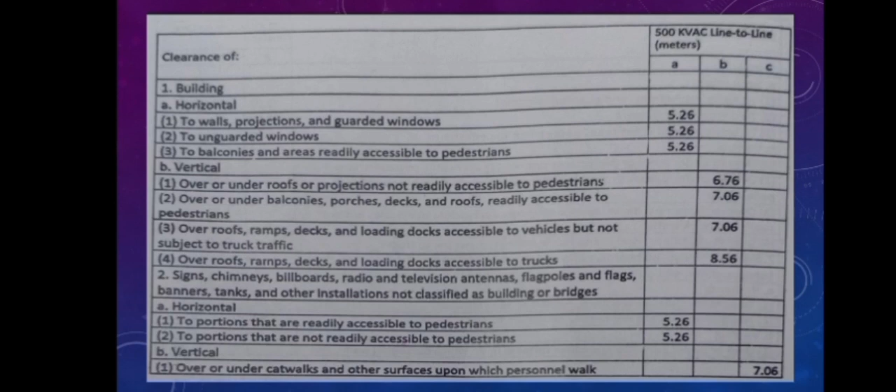B. Vertical: 1. Over or under roofs or projections not readily accessible to pedestrians, 7.08 meters. Over or under balconies, porches, decks, and roofs readily accessible to pedestrians, 7.38 meters. Over roofs, ramps, decks, and loading docks accessible to vehicles but not subject to truck traffic, 7.38 meters. Over roofs, ramps, decks, and loading docks accessible to trucks,

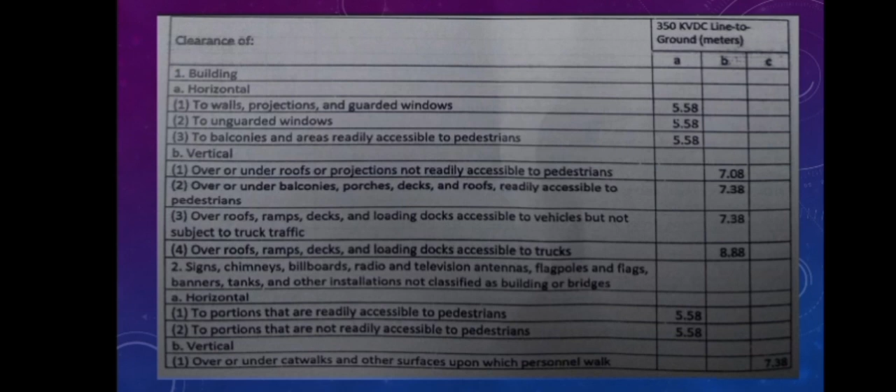8.88 meters. Signs, chimneys, billboards, radio and television antennas, flagpoles and flag banners, tanks and other installations not classified as buildings or bridges. 1. Horizontal: to portions that are readily accessible to pedestrians, 5.58 meters. To portions that are not readily accessible to pedestrians, 5.58 meters. Vertical: over or under catwalks and other surfaces upon which personnel walk, 7.38 meters.

We have power line clearance. The pictures illustrate the required clearance distance between non-hazardous rigid structures like buildings and power line conductors to ensure safety. The left picture shows two adjacent buildings and a power line conductor running near them, and highlights the clearance needed from the wall, projection, for example a TV antenna on the roof, and guarded windows with limited access or special protective measures to the conductor.

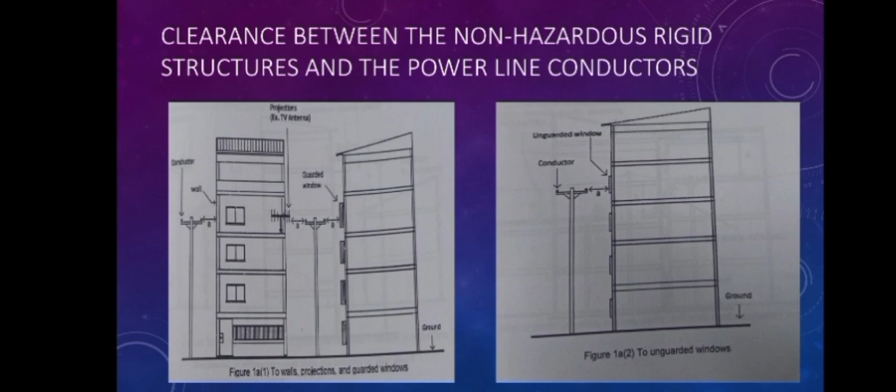Picture 2, or right, shows a power line conductor running alongside a single building and specifically indicates the clearance needed from an unguarded window, like a window that can be accessed easily, to the conductor. In short, the diagrams specify the minimum safe distance required between various parts of a structure, like walls, windows, projections, and overhead power lines to prevent accidents and maintain electrical safety.

Then we have power line clearance, accessible areas. This diagram illustrates two specific scenarios for maintaining safe clearance between power line conductors and parts of buildings that are accessible to pedestrians. Picture 1, left: balconies and accessible areas. Picture 2, right: a conductor under a roof projection. The diagram shows a conductor running horizontally beneath a roof or a structural projection. The clearance distance is measured vertically from the conductor to the lowest point of the roof or projection above. This minimum distance prevents accidental contact from above or during structural maintenance on the roof.

In short, the image demonstrates the required vertical clearance between power lines and areas where people can be present, such as balconies and the underside of roof projections, to ensure public safety and prevent electrical hazards.

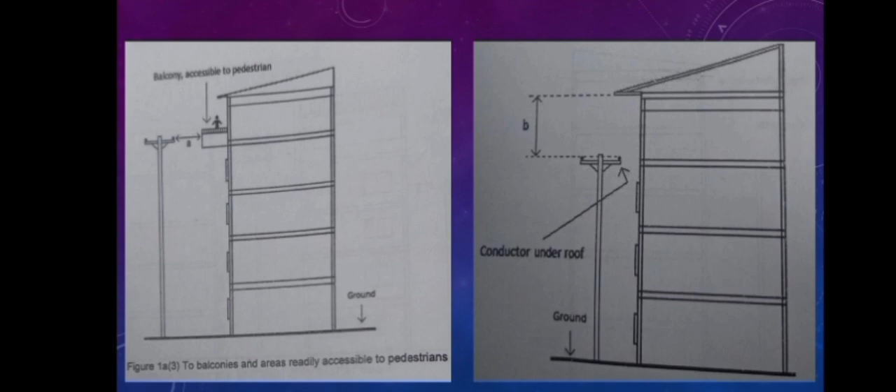Power line clearance, inaccessible areas. This diagram illustrates the required vertical clearance between power line conductors and parts of the construction that are not readily accessible to pedestrians. Picture 1, on the left: conductor over roof. Figure 1, conductor over roofs not accessible to pedestrians. The diagram shows the power line conductor running above a roof. The clearance distance B is measured vertically from the conductor to the highest point of the roof. Since the roof is not easily accessible, this clearance can typically be smaller than clearance to accessible areas like a balcony.

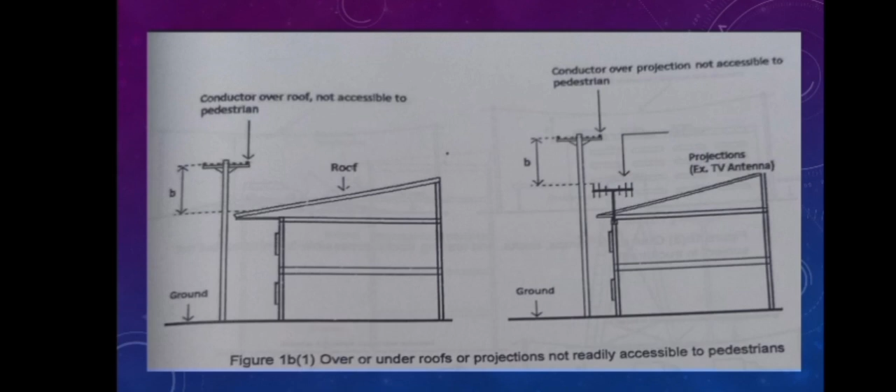Picture 2, on the right: conductor over inaccessible projection. Figure 1b, conductor over projection not accessible to pedestrians, for example a TV antenna. The diagram shows the conductor running above a projection on a building such as a TV antenna. The clearance distance B is measured vertically from the conductor to the top of the projection. This ensures safety for the installer and maintenance workers, even though the projection itself is not a pedestrian area. In short, the image demonstrates the necessary minimum vertical clearance B between power lines and areas of the building, like roofs and projections, not intended for pedestrian access, which generally allows for reduced clearance requirements compared to accessible areas.

Then we have vertical clearance over accessible areas. This picture illustrates the required vertical clearance between power line conductors and areas on a building that are readily accessible to pedestrians. Key features: scenario: the power line conductor passes over areas like balconies, porches, decks, and roofs where people can easily stand or walk. Clearance B: the vertical distance labeled B is the required minimum separation. Measurement: distance is measured from the lowest point of the conductor to the surface of the accessible area, like a balcony or deck, where a pedestrian would be standing. Purpose: the standard requires this clearance to be relatively large to prevent accidental contact by individuals and allow for safe use of the accessible space.

In short, the diagram shows the minimum safe vertical distance B that a power line conductor must maintain when passing over any parts of a building that are accessible to people, such as balconies or decks, to ensure electrical safety.

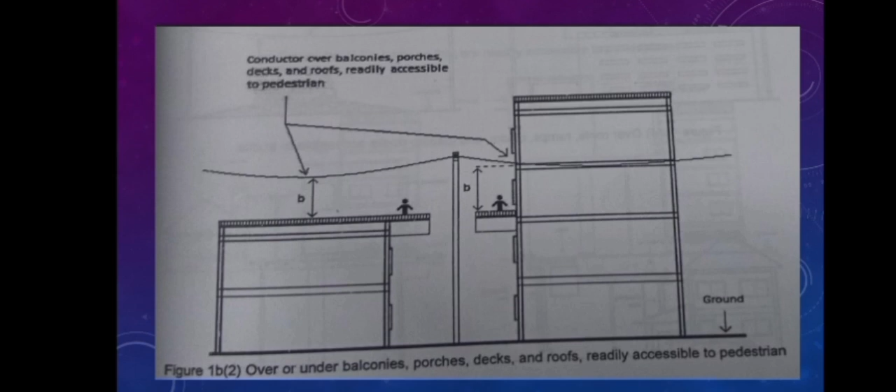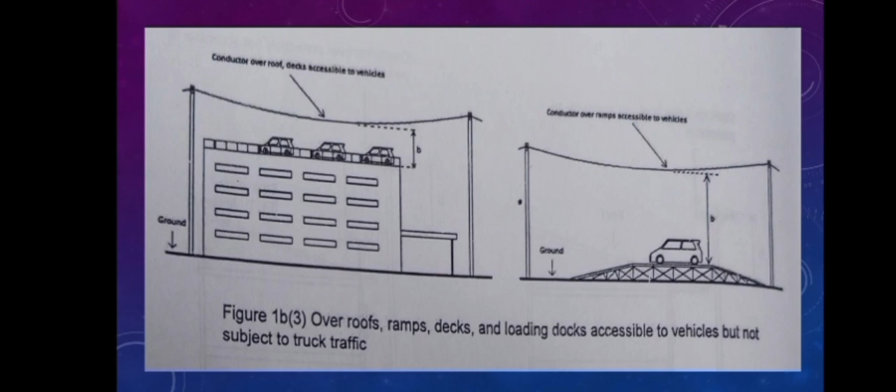Picture 2, right: over ramps. Scenario: the power line conductor passes over a ramp accessible to vehicles. Clearance B: vertical distance B is measured from the lowest point of the conductor to the surface of the ramp. Note: the text specifies this figure is for areas accessible to vehicles but not subject to truck traffic, meaning the required clearance value will be based on the maximum height of non-truck vehicles expected in that area. In short, the diagram shows the minimum safe vertical distance B the power line must maintain when passing over areas like rooftop parking decks and ramps where cars or light vehicles can access, ensuring safety by accounting for vehicle height.

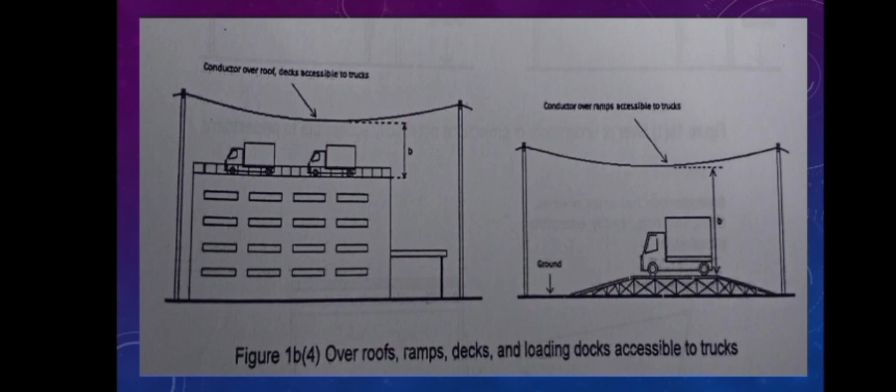Then we have vertical clearance over truck areas. This picture illustrates the required vertical clearance between power line conductors and areas on a